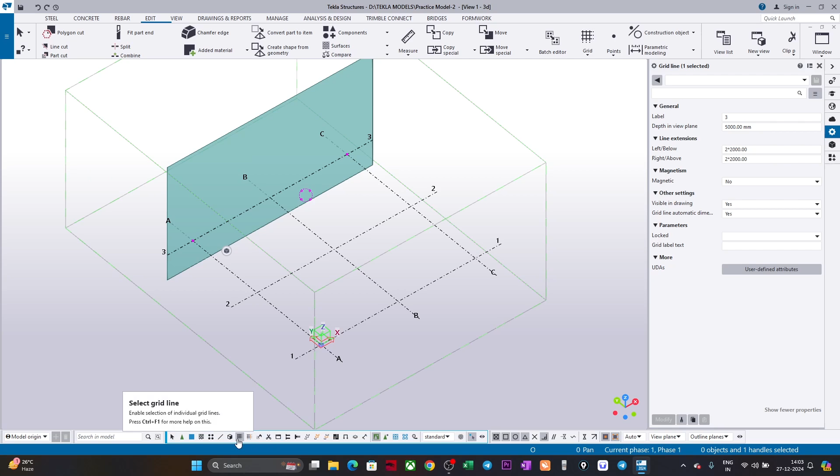So suppose I want to select this particular grid line only. If I select this, it shows the properties for grid line 3 only. So if you want to select any particular grid line, you can use this option. You cannot keep both options turned on at the same time; one of them has to be off and the other turned on. Now if I select this one, the whole grid will be selected since I have the select grid option on. This is one thing I wanted to tell you.

One more thing: if I want to copy the same grid at a certain distance, what is the way to do this? If I select this grid and right click on it, you'll find an option called copy. You click on copy, then select a reference point which you want to move. Suppose I want to move with reference to this particular point, so I'll select it.

Now if I just go like this, you can see a red line which tells me that I am going straight, because the orthogonal option is turned on. You can see a small O here. If it is not turned on, you just press O on your keyboard. If I press O, you can see it is now turned off; if I check, it's not showing. If I press O again, the orthogonal option turns on and it will go straight.

So with respect to this point I am moving, and suppose I want to copy this grid somewhere here. If I click, then click on do not expand, and press escape, you can see another grid is created as a copy of this particular grid. So that is another way of copying this grid.

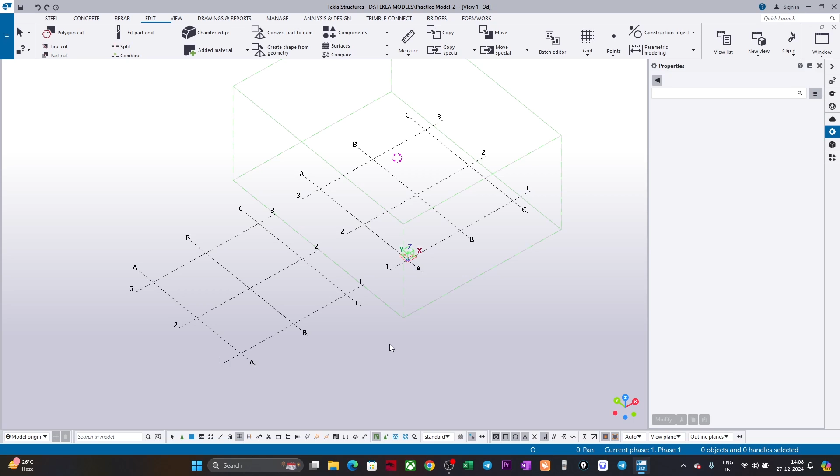If I select the grid, right click and click on copy special linear, here you can put any value. Suppose I want to move it 20 meters from the current location. I'll put the value minus 20 meters in the direction I want to shift, then click on copy here. You can see it is created, and if you click on do not expand, your other grid is ready here.

This way you can also mirror or rotate this grid; we will see those options later. So this is the way to copy the grid that you have.

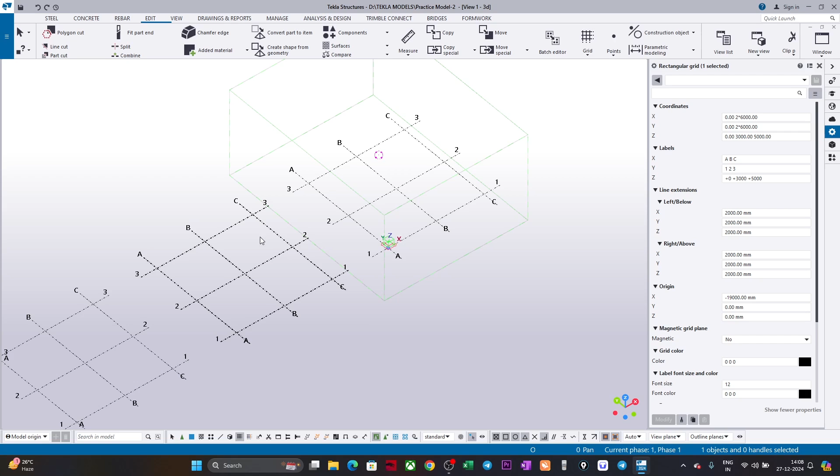If you want to draw any additional grid line, go to Edit and Grids here, you will find an option called add grid line. Click on add grid line, and suppose I want to draw a grid line here. I will select this point, then another point, and do not expand, and you can see another grid line is created.

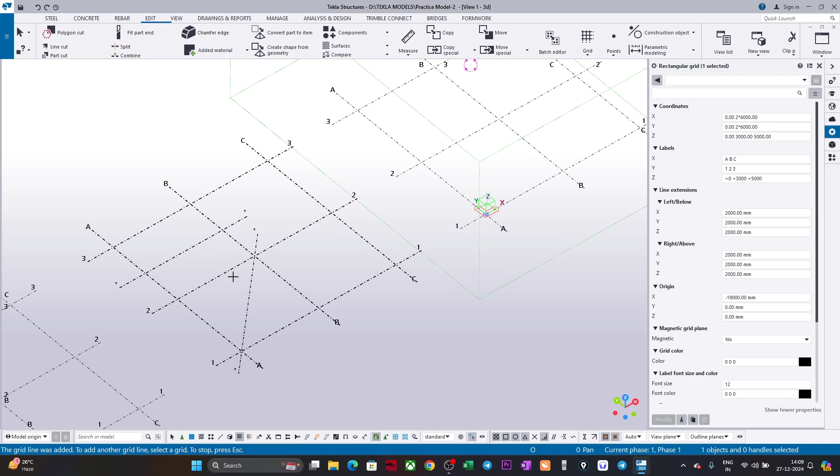Suppose I want to select the midpoint, midpoint of this, not expand. You can see very easily you can create a new grid, or suppose here I have this midpoint, additional grid I want to create. Like that, you can create these grid lines.

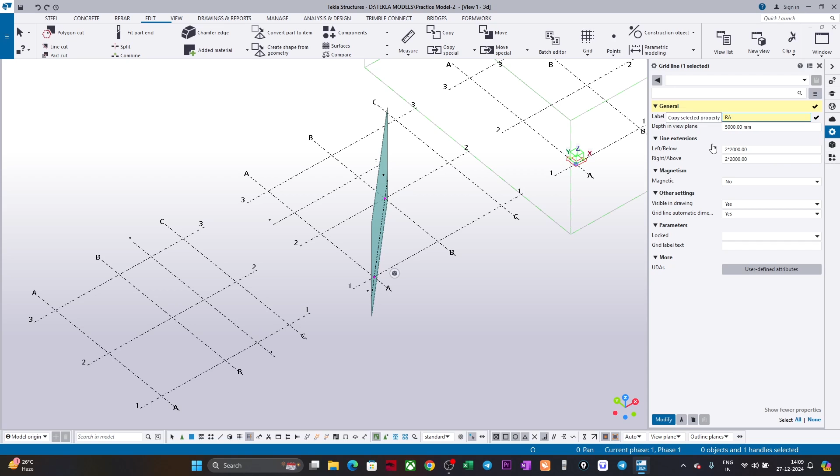And if you want to name it, you just take this option, select grid line. I will select this grid line and name it, suppose A1 to some name, suppose RA, as per your requirement, whatever name you want to provide. Suppose this one, you want to name it as 2-dash, and modify. Like that, you can change the name of individual grid lines, and you can create individual additional grid lines also if required.

So this way you can copy a grid and create grid lines, and you can use the linear move option or linear copy option also, by providing a direct value of how much you want to shift, or at what distance you want to create the copy.